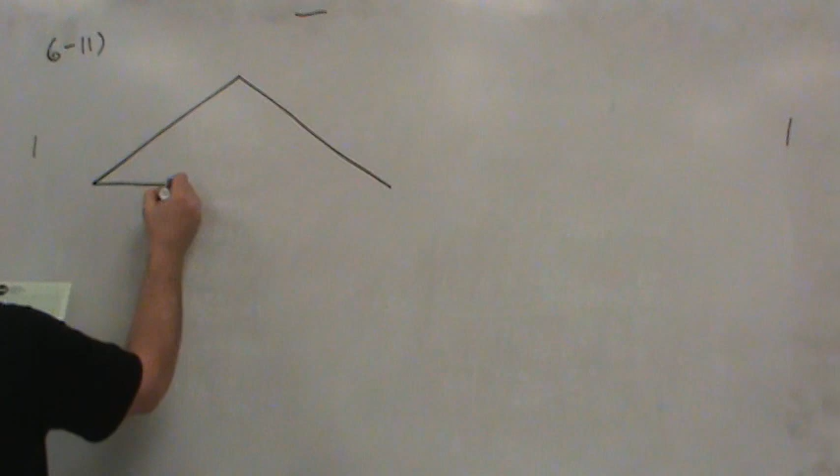Several geometry details to include. The structure of the truss looks something like this.

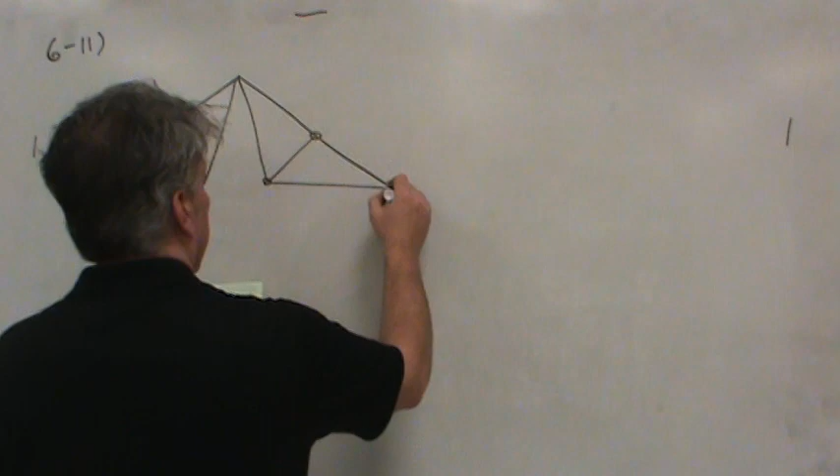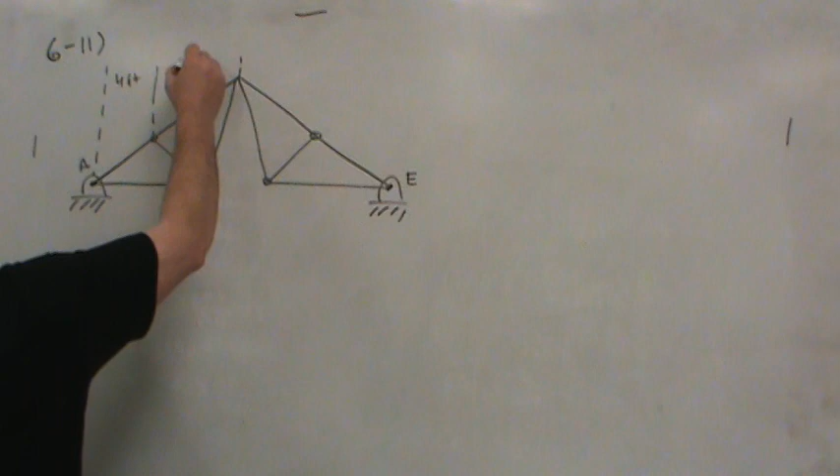Pivoted or pinned at A, pinned at E, with a 4-foot spacing horizontally between the pins, despite my drawing. And it's a symmetrical truss.

Now what is not symmetrical is the loading. P1 at 600 pounds is at the center, so that's not what makes it unsymmetrical. It's this load over here, P2, at 400 pounds.

Now other geometry given is that the overall height is 6 feet. And hopefully you realize that this line, since it's broken up horizontally in equal increments, then we also have 3 feet heights

on that center pin. By the way, there are letters given to each pin. Let's jot down those letters. Here we are. And that's the problem that we're supposed to solve.

So what I wanted to do was get some geometry for all of this, because we've got overall things, but for example, what's the length of this side, or this member, or this member? So let's see if we can figure that out.

Now notice that this is a right triangle, as is this one, and therefore these two triangles, CDF and DFE, are similar triangles. Maybe not in the order of the letters that I gave them, but they are similar triangles. So if we could just figure out this triangle by itself, we'd have it.

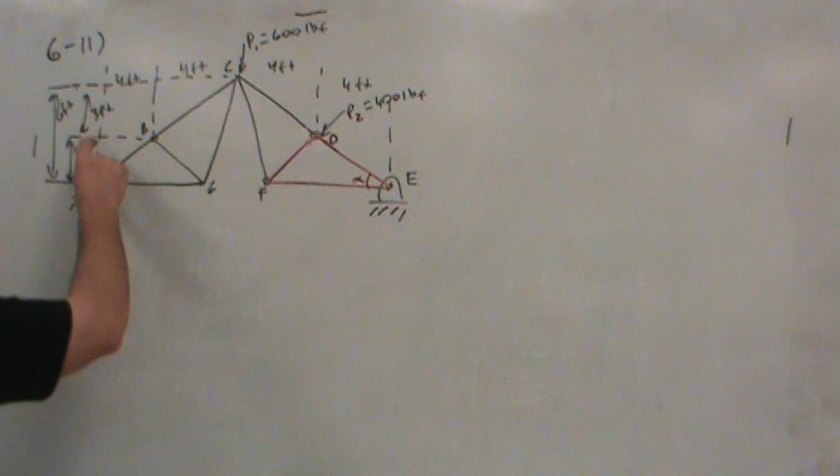Now, it's pretty apparent that if we've got a 3-foot height and a 4-foot side length, then we can use that information to our advantage, because we can think of breaking up this triangle into parts like this, right?

We know that this height is 3 feet. And we also know that this base is 4 feet from there to there. So that means that the length of a side is 5 feet.

So we know now that we've got a 10-foot length on that overall side, okay? Not really a big surprise. I mean, you can look at this length, 3, 4, 5. Okay, that makes sense.

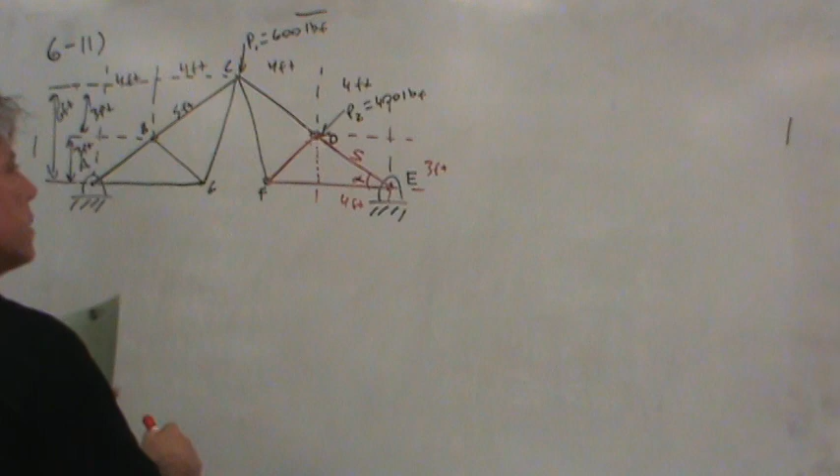But I wanted to point out that what we really know is this base length of 4 feet here. Now, since this is in fact a right triangle, there's another triangle we can consider.

Let's consider the overall triangle again. The overall thing where the base is not, well, it would be the hypotenuse in this case. So forget that 4 feet for just a second. Let's call this angle over here beta.

If we now consider breaking up that right triangle into some other right triangles, just looking at these angles, you should realize this angle has to be alpha. Why? Because the original triangle had alpha, 90 degrees, and beta. The new triangle still has beta here at a 90-degree angle, so that side has to be alpha. Okay?

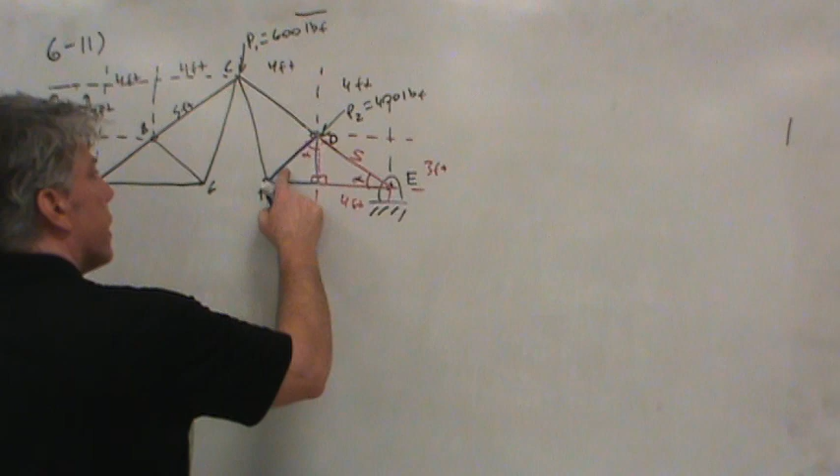And that's sort of the key to this problem. So let me highlight this new triangle in blue so it's easy to see. The angle beta doesn't matter, it just proves that the other interior angle is alpha. That's all we really need.

So let's pull out this triangle and work with it just a bit. And I'll put dimensions on this figure in a moment. So what do we know about this triangle? Well, we know that this side has a length of 3 feet.

We know the angle here is alpha, and so since the original triangle is a 3, 4, 5, or the other red triangle is a 3, 4, 5 triangle, and the blue triangle is similar to it because of the angle alpha, then this is also a 3, 4, 5 triangle.

However, that becomes a little bit confusing. Let me just call this side y for the time being. We know it's 3 feet, but let me just call it y. Now the way this is set up, obviously the hypotenuse is the 5 side.

And if you think about this, we have to rotate it to relate it to the red triangle. So this is the 4 side, this other side is the 3 side.

Now we're just talking about ratios here, so what about if we scale the side lengths based on this side? So let's call this the 4 over 4 side, this is the 3 over 4, the 5 over 4 side. All we've done is multiply by a constant, and their ratios are still the same.

So what's interesting about this is we can multiply y by the fraction for the side and get the length. For example, we know that y is 3 feet, 4 over 4 is 1, so this side is 3 feet. All we have to do is multiply by y on this side and y on this side, and now we have the side lengths. Now we know that y is actually 3 feet, so now we know the length of this side. It is 9/4 of a foot.

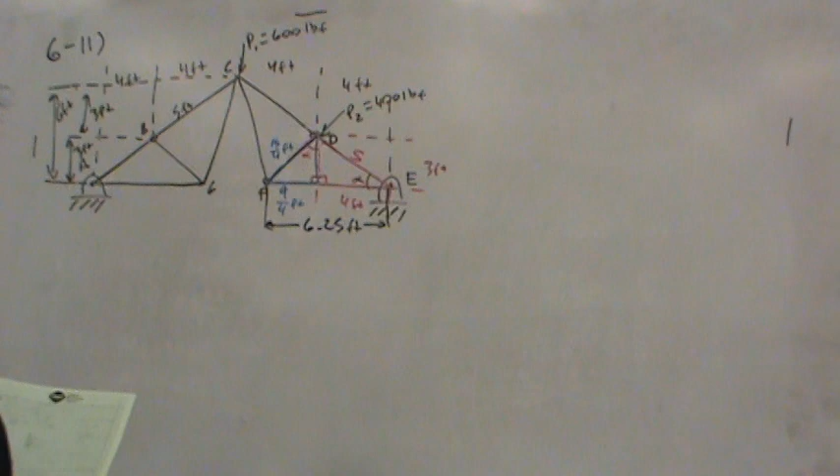There's one more bit of information that would be nice to have. Let me sketch a bigger section of the truss. This. And by the way, 15 over 4, let me just write in what this number is. 15/4 turns out to be 3.75 feet. And I don't think we need this broken up anymore, so let me just write 6.25 feet there.

And we don't need any of this stuff anymore. But the length overall of this side would be 5 plus 5 is 10. We know this is 3.75 because we have similar triangles. This is 6.25, as is this one.

So let me ask the question, what about this little triangle right here? It's also a right triangle. It has a hypotenuse of 6.25 feet. It's from here to here. And what about the height? Well, the height is 6 feet.

So what about this base? Well, you could use Pythagorean's theorem to determine it. When I did that, I found it was 1.75 feet. Okay, so this little triangle right here was another one that I was concerned with. The reason I wanted that is because I wanted to know what this dimension is, and it's 1.75 feet.

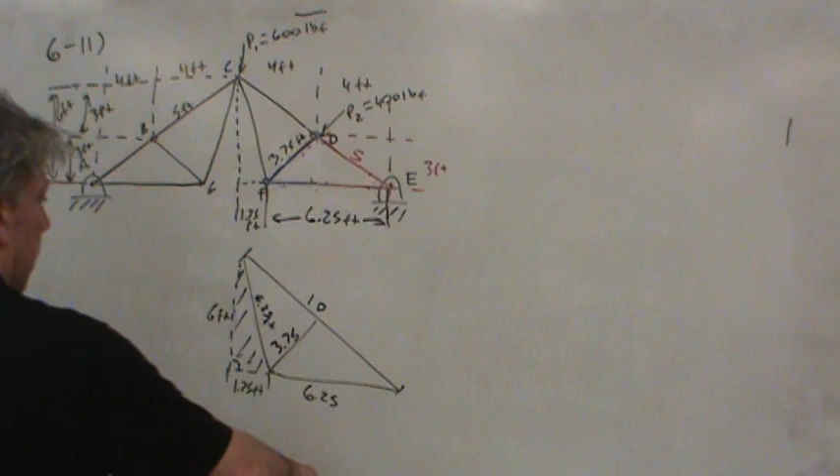So now I think we've got all of the relevant geometrical information that we need. Not surprised, no, I didn't have to go through that. I could have simply said, well, we've got 4 feet, 4 feet is 8, minus 6.25 is 1.75. But for whatever reason, that's the way I went. Okay. So there's our geometry.

Now let's continue with a free body diagram and actually get into the statics of this truss, or a static analysis of the truss. So we've got our 600-pound load external, we've got our 400-pound load, and despite my drawing, it acts directly along that line FD. We've got AY at A as well as AX. We have EX at E and EY.

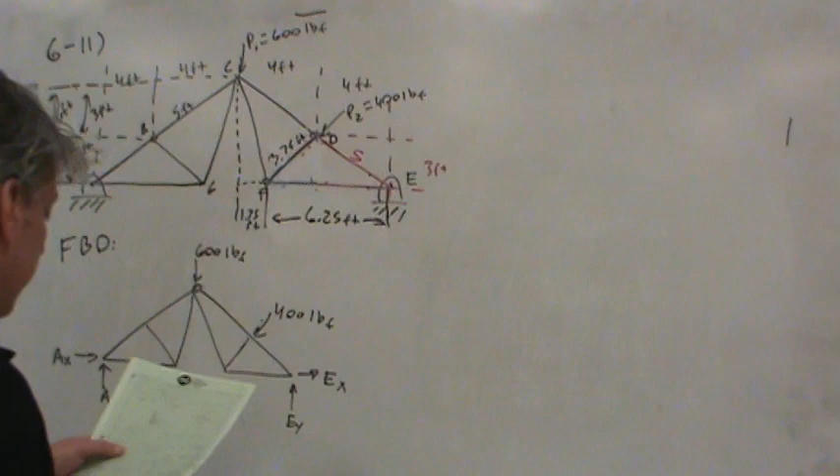And so now we can start solving this truss. For example, we can sum moments about point A in order to determine, well, anything else, I guess. Sum of moments about point A taking counterclockwise as positive. What would we get? Well, notice that EX passes through that point. EY does not. AY, AX pass through. That's the whole point in taking moments about point A.

It's going to be a little bit of a pain to deal with this 400-pound force, but we can do it. But we're trying to go for EY. So let's start off with that. We've got 16 foot times EY. Okay, that's the whole point in calculating this sum of moments, and EY does cause a positive moment.

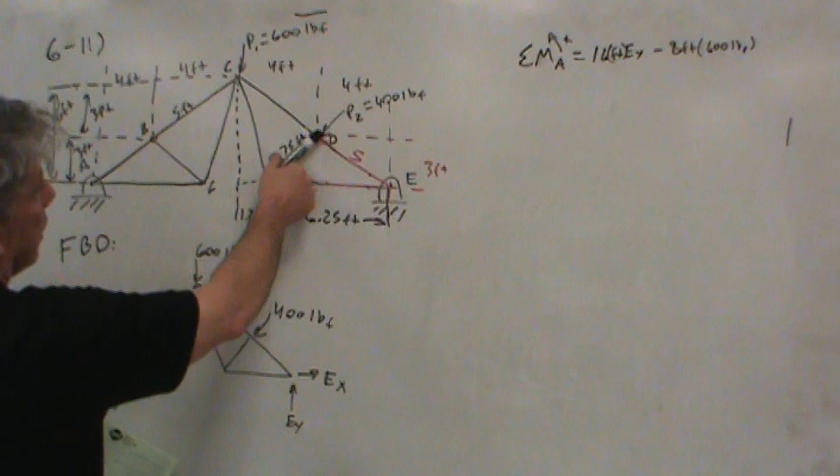The 600-pound load causes a negative moment, so minus 8 foot, its moment arm, times 600 pounds. But what about this 400-pound load? Well, the key is that it acts right along this line. So coming up with its horizontal and vertical components will actually be pretty easy.

Let me do this. Let's go back to that blue triangle we were talking about a little bit earlier. And let me draw it over here. It is the geometry triangle that will help us break up this 400-pound load into horizontal and vertical components. Remember the ratio of the sides. We had one side over here was the, well, let's just use the geometry we have. We have a 3-foot side, 3.75 foot side, and I erased this, but it was 9/4, if you remember, of a foot.

That comes out to, well, 4 away from that, so that's 2.25. Now we can use that to calculate the horizontal and vertical components of the 400-pound force. So all we have to do for this side to get the vertical component is take 400 times what? Multiplied by 3 over 3.75.

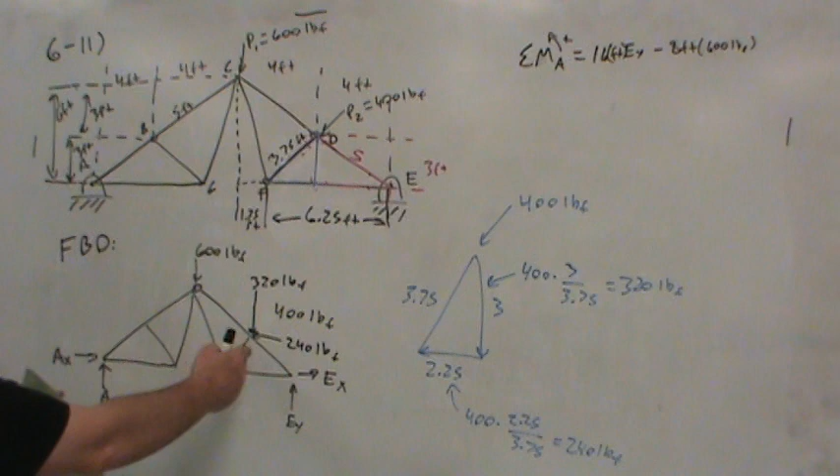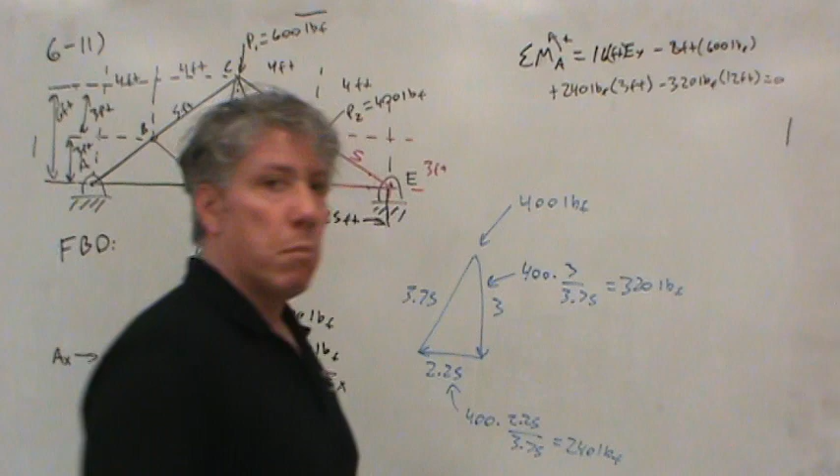Now calculating the moments of these two forces will give us the same equivalent moment to the total 400-pound force, but now the geometry is easier because look, the moment arm for the 240-pound force is only 3 feet, and it is a positive moment. So plus 240 pounds multiplied by the moment arm of 3 feet, because this force acts up above the point by 3 feet. And then all we need is the moment arm for this 320-pound force, but that is 4 plus 4 plus 4 is 12. And of course it's a negative moment about A because it tends to rotate clockwise. So minus 320 pounds multiplied by 12 feet.

So this moment sum, the sum of the moment of these forces, must come out to 0. So from this we can solve for EY. I won't show you the algebra, it's pretty straightforward. It comes up to 495 pounds. Basically, take this sum here, take the opposite sign of it and divide by 16, you'll have EY. So that gives us EY. Now what I'd like to do is go for another color and actually put the reactions on the diagram so that we'll have the space to solve this, because we're going to need quite a bit of space here in a moment. So 495 pounds is EY.

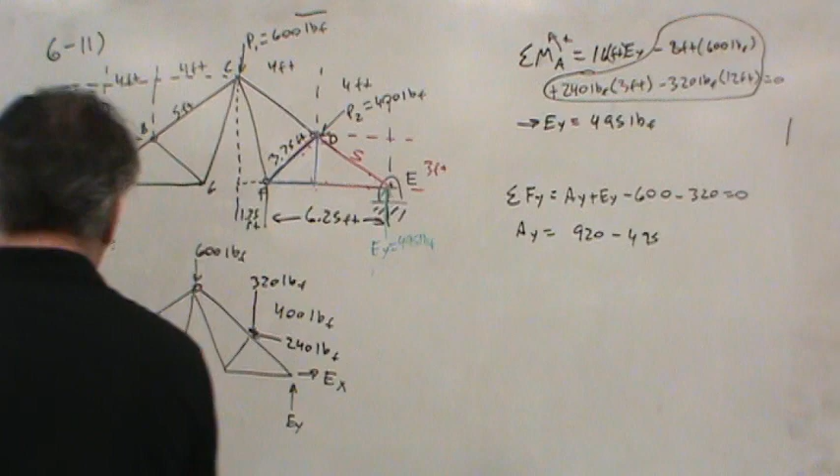Now, if we sum forces in the vertical direction, we should be able to find AY as well. So summing forces in the vertical direction for the overall free body diagram, now that we've broken up that 400-pound force into two parts, that should be pretty easy. So that would be what? Well, it'd be AY plus EY minus 600 minus 320 equals 0. Right? Let's see. Have we accounted for all? 600, 320, EY, AY, yes. And so solving for AY, we would get, let's just combine these two and move to the other side. So that's 920 minus EY, so minus 495. If you do the math, you'll find that the magnitude of AY is 425 pounds. Okay.

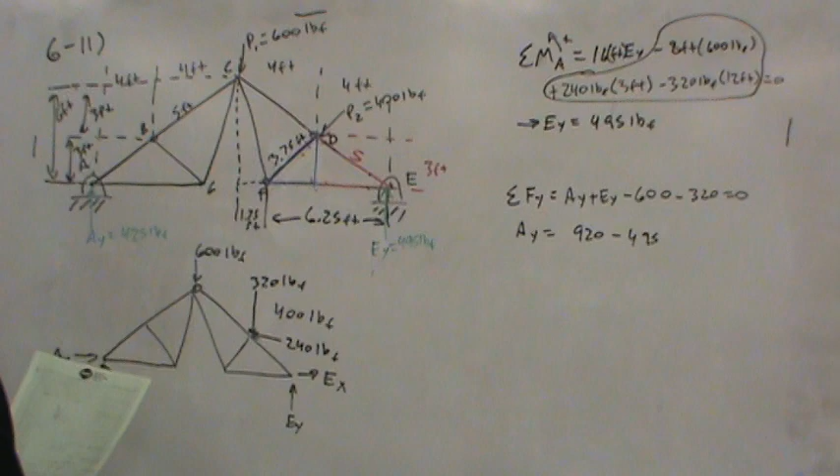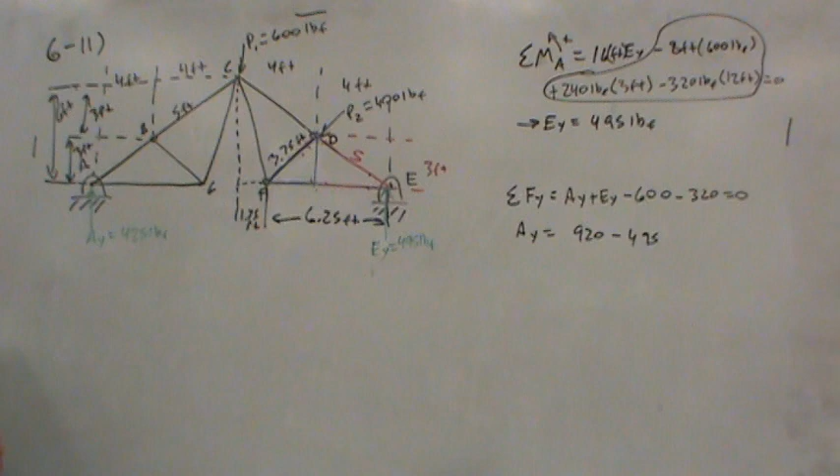So now we found AY and EY. What about AX and EX? Well, we can't really say much about the horizontal components of force at A and E, but we can write down an equation that we'll kind of keep in our back pocket and maybe use it later as a check or use it to calculate reactions, I don't know. But basically, if we sum forces in the horizontal direction, oh, I've just erased my free body diagram, I'm sorry. Remember there was AX and EX, and the only other component of force in the horizontal direction was the horizontal component of P2. And it was a negative component, and it would be magnitude 240 pounds. So all we have is a relationship between AX and EX from the overall free body diagram.

Okay, now there's something else that we can notice here. Let's look for zero force members. We can't say that this member is a zero force member because if you think about the free body diagram of point D, which we'll get to in a moment, you realize we have P2 as well as force here. Yes, it's true, CD and DE can't apply any force in this direction, but obviously since P applies force, this member has to apply force. And actually the magnitude of the force in this member, FD, has to be 400 pounds compressive, right? That's pretty easy to see.

In fact, why don't we go ahead and write that down? I kind of stole my thunder, but this must be 400 pounds and it is compressive. So I'll write in parentheses C. But notice BG, if we consider a free body diagram of point B, the line of action of CB and BA are collinear, and therefore, since there's no other external force, the force in BG has to be 0. It is a zero force member. Okay, so we'll start with those two.

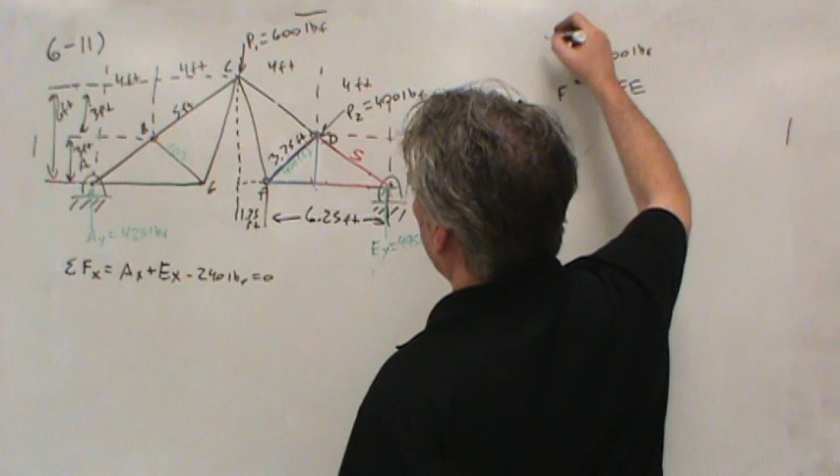Why don't we go ahead and consider, I guess I did consider my free body diagram of D there, I just did it in my head. How about if we consider point F? Because since we know 400 pounds of compression in member FD, we should be able to solve for the force in the other two members, FE and FC. So let's go for a free body diagram of point F and see what happens. So we know there's a compressive force of 400 pounds here acting along FD. And the question becomes, what is FE's magnitude and what is CF's magnitude? Okay.

If we sum forces in the vertical direction on point F, what will we get? We'll get the vertical component of the 400-pound load, which was negative 320 pounds. So this comes from this part. But then CF is the only other thing that can counteract it, so CFY would be the only other force.

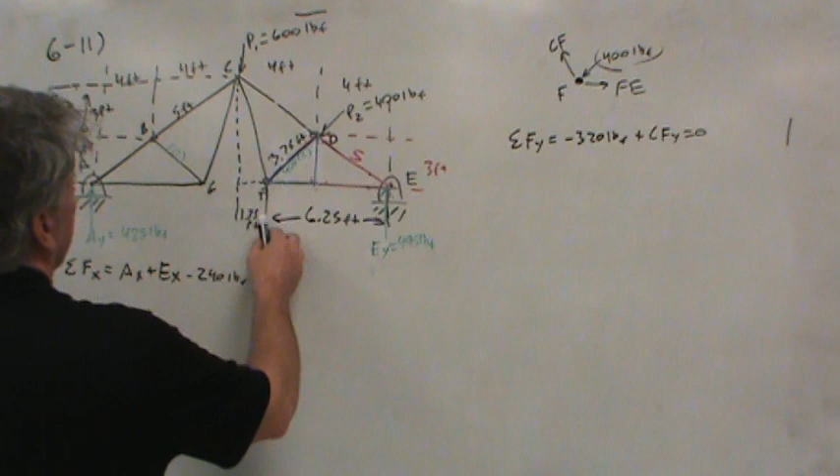Now, how can we figure out the y component of CF? We have a triangle here to do that. We know the length of this side is 6.25 feet because it's similar to this one. We also know the height of this triangle is 6 feet. So to get the vertical component of the force in this member, we take 6 over 6.25. Let's make that substitution.

And now from this we can solve for CF. So the force in CF would be 320 times 6.25 over 6. When you do the math, well, by the way, I'm assuming CF is tensile. It came out positive, so it is in fact tensile. You'll find that the load in this member is 333.3 repeating, and of course it is a tensile load.

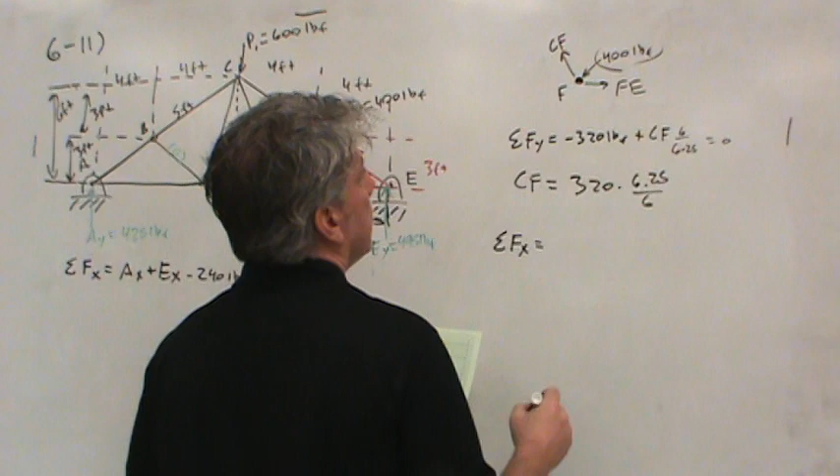What about summing forces in the horizontal direction? Well, there we'll have FE minus the horizontal component of the 400-pound force, which was 240 as I recall. But notice we also have tension from CF, let's call it CFX. So FE, the force in that member, would be equal to 240 plus CFX.

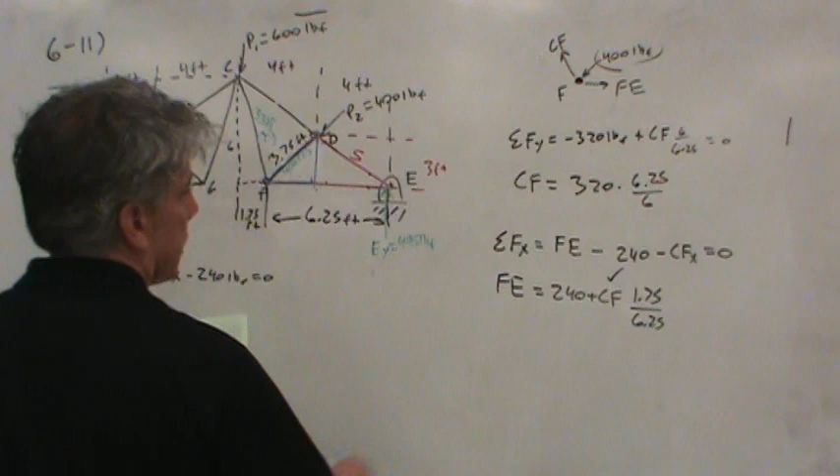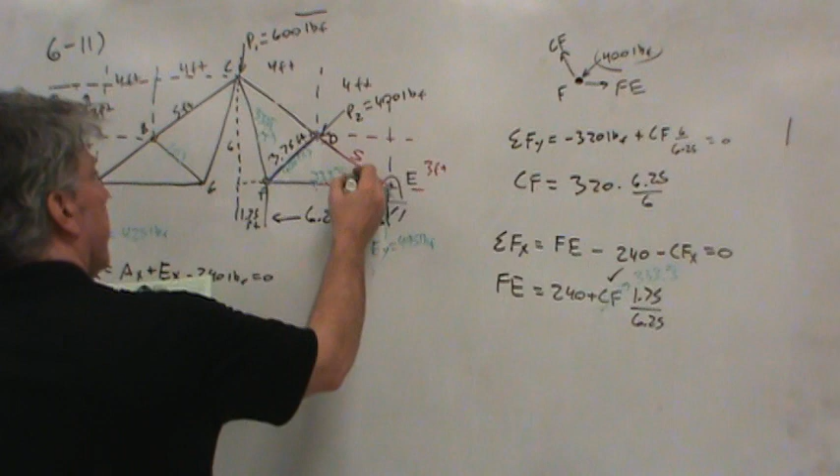But to get the horizontal component of CF, we need 1.75 over the hypotenuse. I erased its length, but hopefully you remember that was 6.25 feet. So since we know CF, we can plug in numbers now and find the magnitude of force in member FE. CF is 333.3 repeating. Plug that into your calculator and you'll find FE is positive, so it's tensile, and the load in FE comes out, ironically enough, to 333.3 repeating, and it's a tensile load.

All right, so that takes care of the free body diagram of F, and we've managed to find the force in 3 of the members, well, 4 so far in the overall problem.

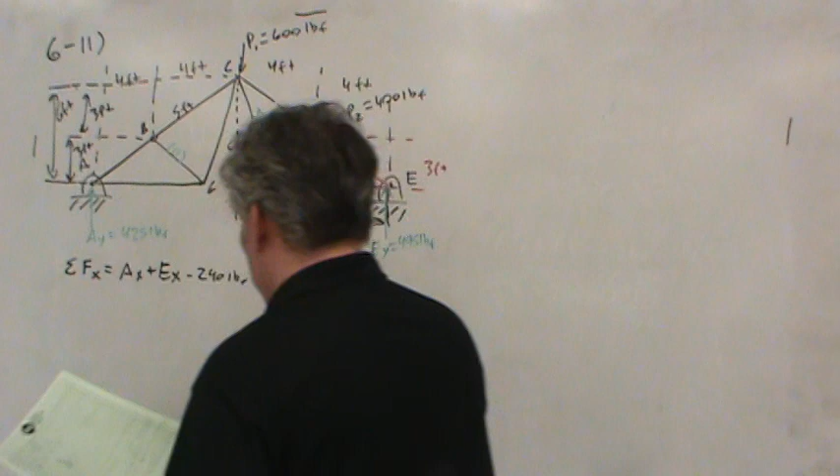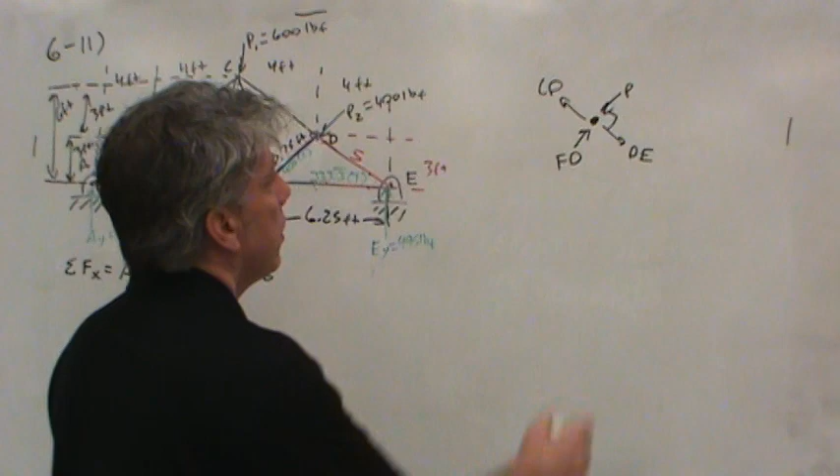Now we'd like to know the force in these 2 members. Notice, if you think about a free body diagram of point D, I probably should have drawn it from the very beginning, we already figured out that whatever load P is, the force in FD has to counteract it. But if you think about the load in DE and CD, there's no interaction here, right? These are perpendicular to one another. And so CD must be equal to DE from the free body diagram of point D, or pin D.

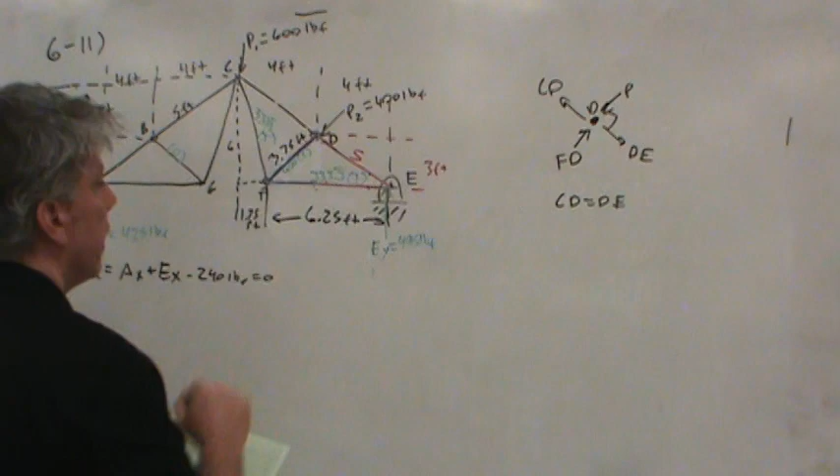So if I just knew the force in either CD or DE, I would know the force in the other. So what I'm going to do is consider a free body diagram of point E. We know that CD and DE are equal, let's jot it down so we don't forget it, and that's from a free body diagram of point D. Let's consider a free body diagram of point E, because now we know EY and we know FE, and so we should be able to figure out DE.

Now, there is one more force at this point, and that is EX. So what do we know, what do we not know? We know FE, we know EY, and we should be able to get EX as well as DE. This is a good thing. So let's start off by summing forces in the vertical direction, because I'd like to get the force of the member first. That would be equal to EY plus DE in the vertical direction, so let's call that DEY, and that's it, there's nothing else.

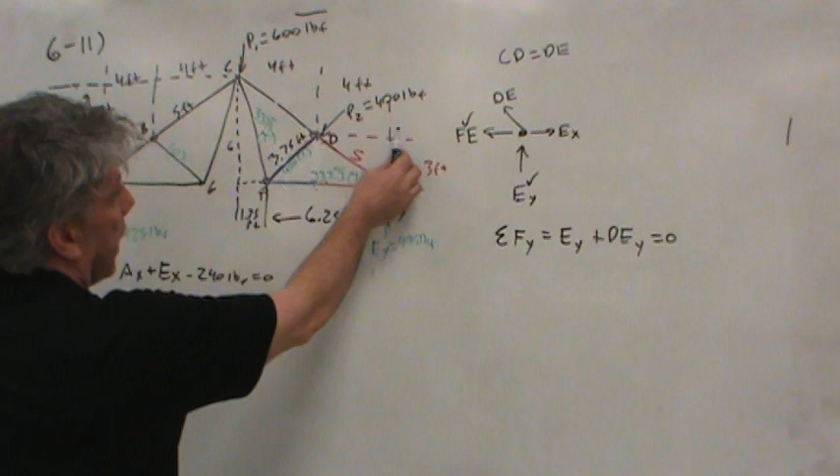How do I get the vertical component of this line? Let's see, I see a 3, 4, 5 triangle, so I need the 3/5 length. That's it.

So if we then solve for DE, we'll get negative EY times 5/3.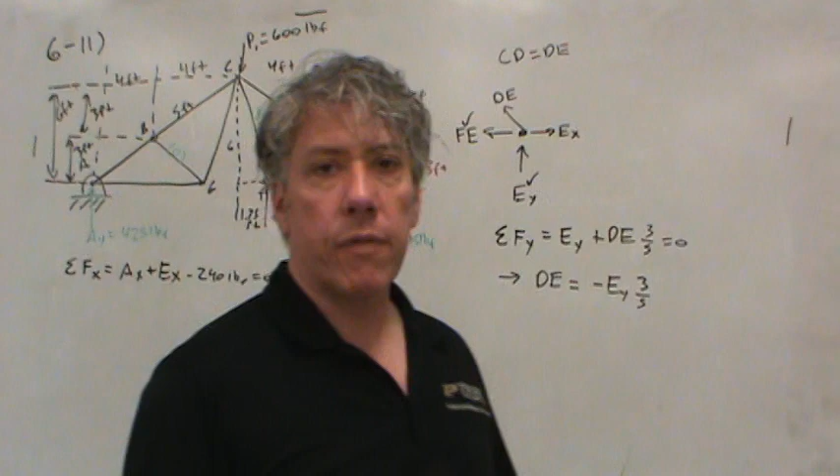Notice it doesn't really matter how these reactions occur. What matters is that I've plugged in the load in the member as a tensile load, so if I get a positive number, I know it is tension, and if I get a negative number, I know it is compression. I'm getting a negative number. Not surprisingly, the upper chord of this truss is most likely going to be in compression, right? That's what we expect, so this is not really a surprise.

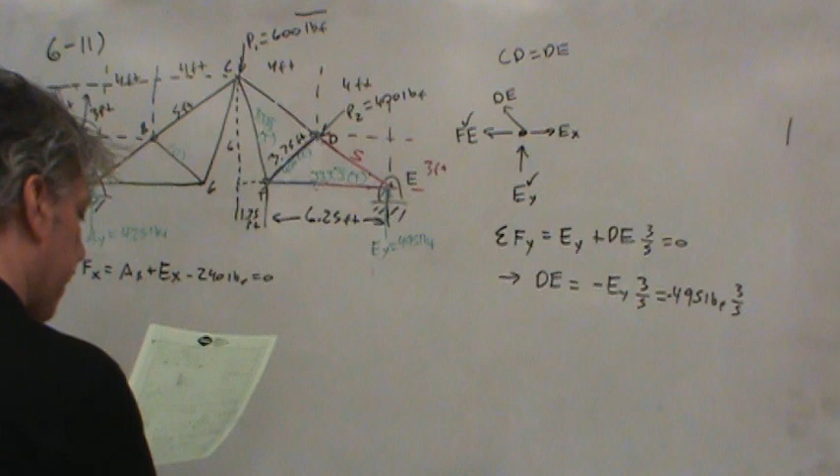So EY has magnitude, well, let's not forget our negative sign, 495 pounds. Take 5/3 of that, and we get the force in DE, which is a compressive force. So when I did the math, I found that the force, let me just get rid of that 5, we don't really need it right now, is 825 pounds, and that is a compressive load.

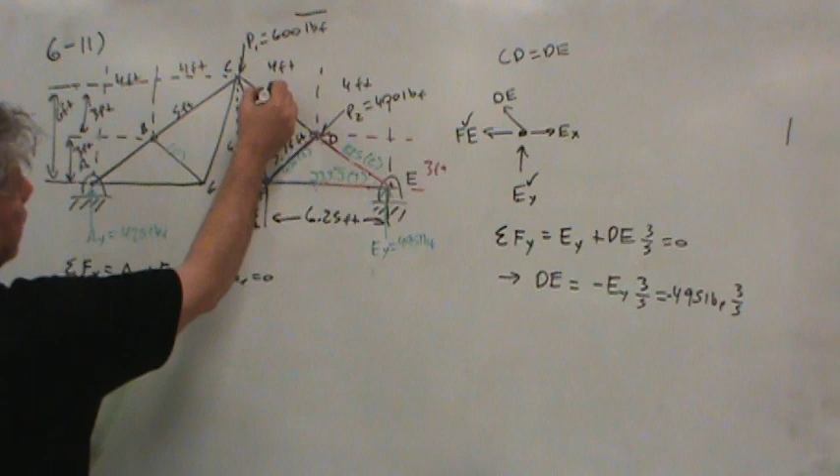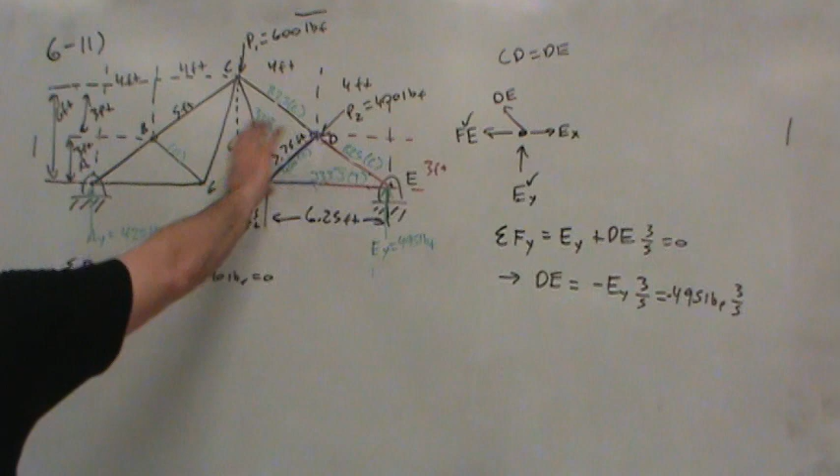Now, since we know that CD and DE are equal in force magnitude, that gives us 825 pounds compression in CD as well. And we're basically halfway through this truss, right? We've solved all of the right-hand side and one of the left-hand side.

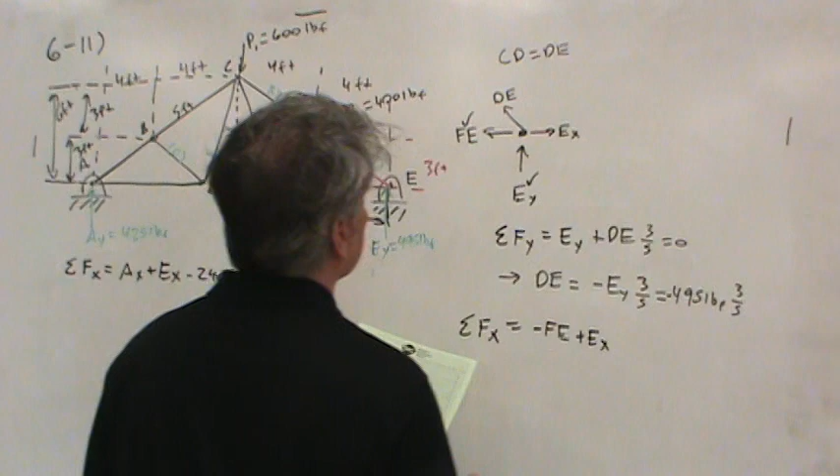Now we can go ahead and use the fact that we've got another equation to solve for the force EX. So what would that be? Well, negative FE plus EX minus DEX. Remember, I'm assuming DE is tensile, and when I plug in the value for DE, I'll plug it in as a negative number. So solving for EX from this, it would simply be FE plus DEX. Well, FE is known. The force in member FE is a tensile load, so 333.3 repeating.

DE has a magnitude of 825, but it's negative, so there's my compressive load, but I only want the X component of DE. How do I get it? Well, again, remember this small red triangle was a 3, 4, 5 triangle, so I just need the 4/5 side of that.

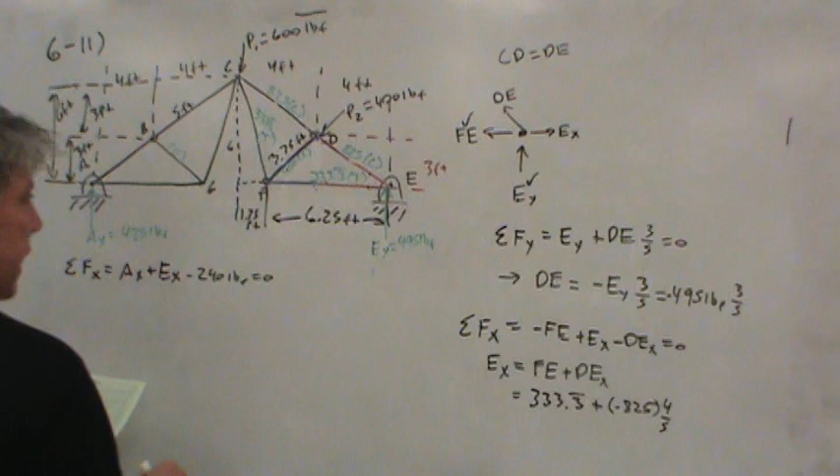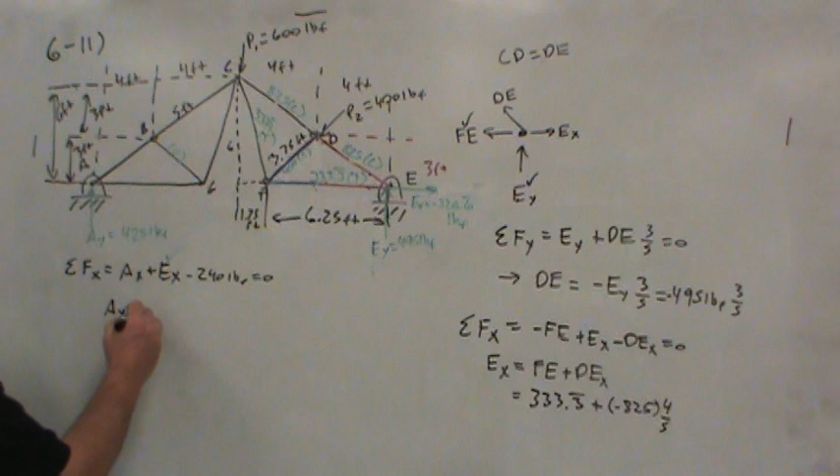And when you plug in the numbers to your calculator, what you will find is that EX is in fact negative. So EX, I will draw it in the direction that I had on the original free body diagram, like this, but it is a negative number from this equation. It is negative 326. You know what, I don't like that, I'm going to move it down. EX negative 326.6 repeating pounds force.

Now, when you plug that in for EX into this equation and solve for AX, it will yield AX. In fact, AX would be 240 minus EX, so 240 minus negative 326.6 repeating. And when you do the math, you'll find that the value of AX is, let's see, 566.6 repeating pounds force.

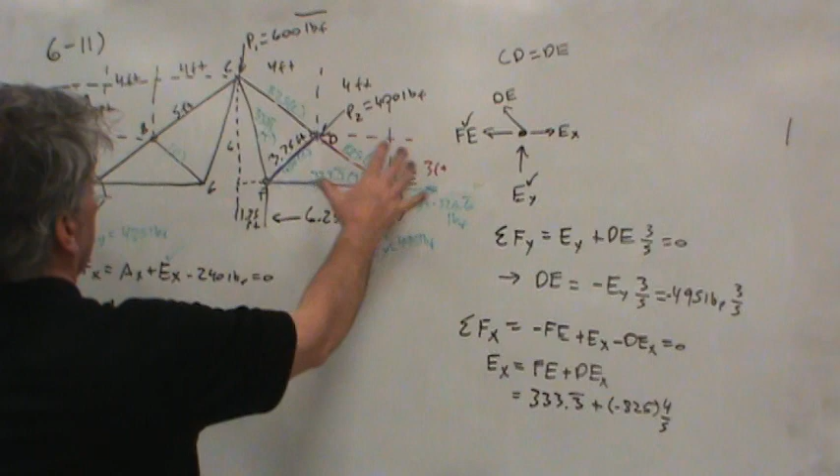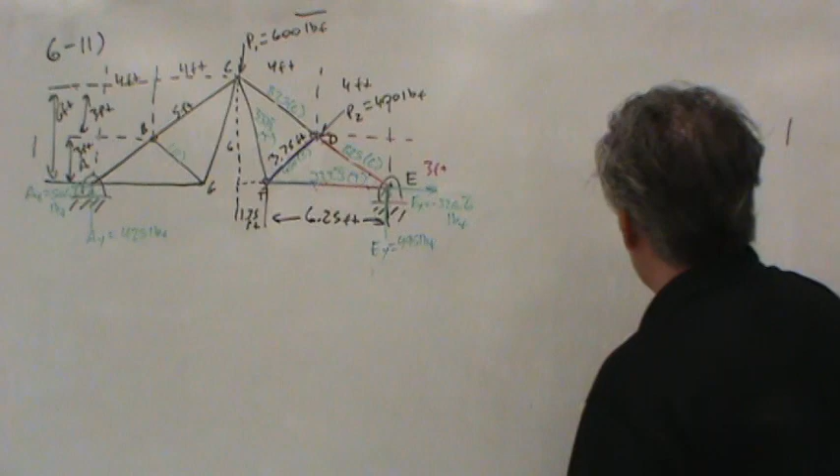Now, in reality, of course, pin E is pushing this way. Both A and E are pushing this way, which makes sense. If they don't, the whole truss will just sort of collapse out of the center, right? So that makes sense. So now I'm satisfied with all of those results.

Okay, so now let's continue and consider another point. Now that we've got the reaction at A, why don't we take A as our next free body diagram, or free body point. We've got AY, we've got AX, we've got AB, and we've got AG acting on this point.

Now we know that AY is 425, and we know that AX is 566.6 repeating, and these are of course both pounds. So why don't we begin by summing forces in the y direction? Why? Because AG will not appear. I will get AB directly, and then the horizontal component of AB can be included to find AG. So summing forces in the vertical direction, I'll have 425 pounds from AY plus ABY, and that's it. There are no other vertical components of any forces on the point or on the joint.

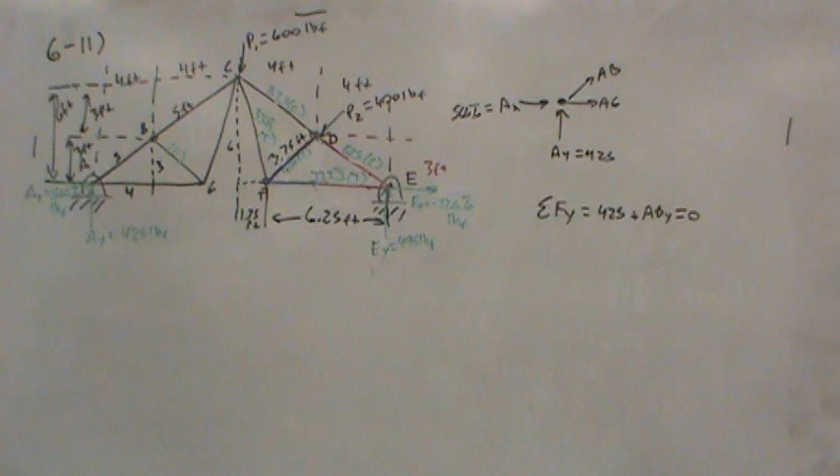So how would I get ABY? Well, remember that this triangle is a lot like that one, right? It's a 3, 4, 5 triangle, at least to there, okay? So in order to get the vertical component of AB, I just need 3/5 of AB. So let's make that substitution.

And now let's solve for AB. So AB is 425, well negative, we got to move it to the other side, times 5/3. Okay, when you do the math, you will find then that FAB is 708.3 repeating, and it's of course negative, so that's compression. So 708.3 repeating in compression, pounds force.

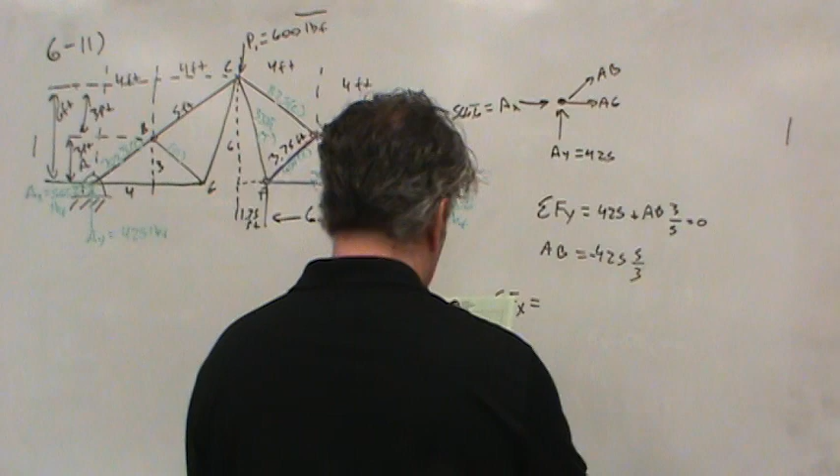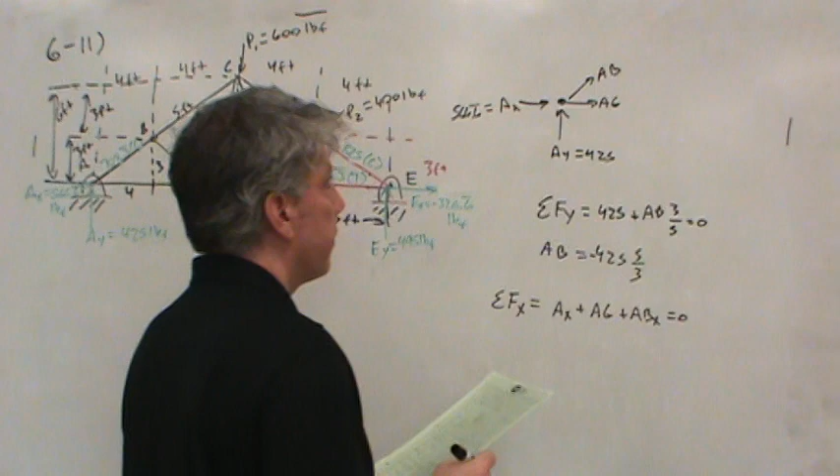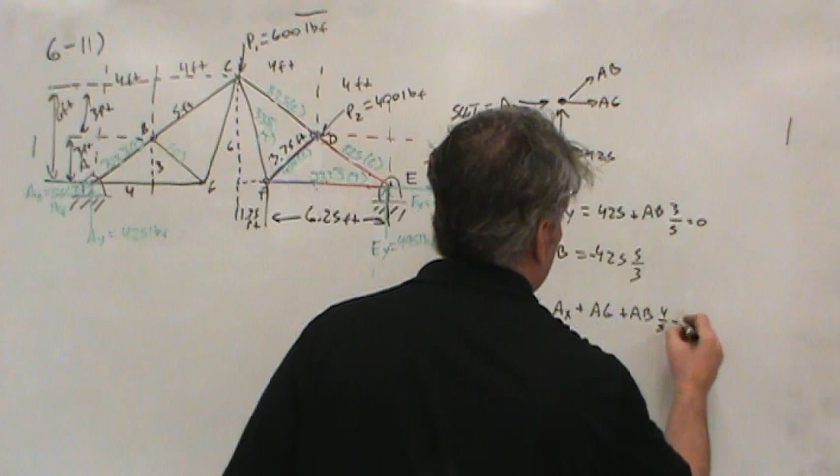Now if we sum forces in the horizontal direction, we'll have AX plus AG plus ABX equals 0, okay? Now how do we get ABX? Well, again, AB is right here, so that's the 4/5 side of AB, or 4/5 times AB.

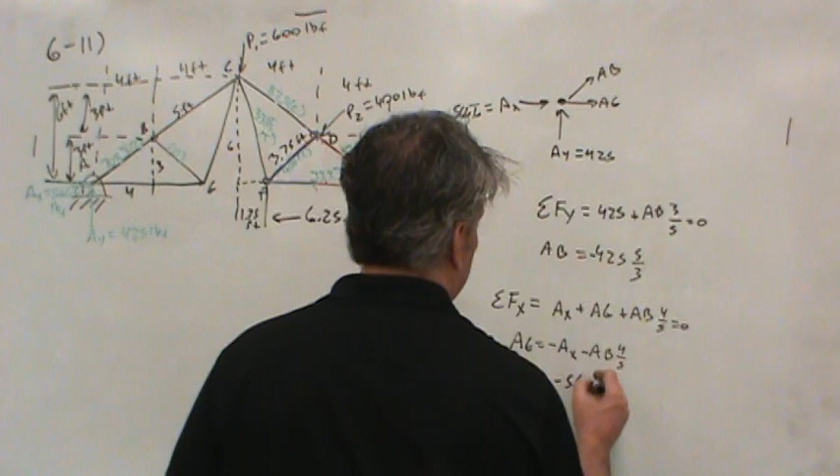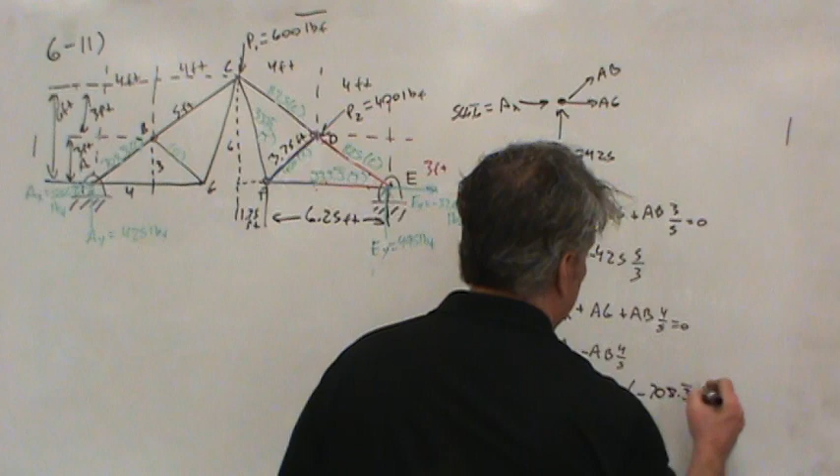And so if we solve for AG, we get negative AX minus AB times 4/5. Well, negative of AX would be negative 566.6 repeating, but remember AB is a negative thing, it is in compression, so 708.3 needs to be plugged in negative, and then take 4/5 of it. So here is the load in member AG in pounds. When you do the math, it turns out that the force in member AG is actually 0.

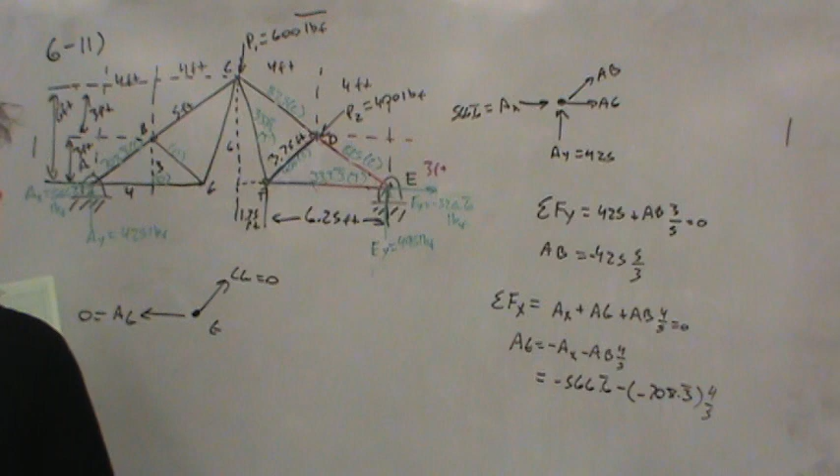Now we could have determined this in a much easier way. We could have taken point G as a free body and said, look, this is the only thing that can happen, right? There's BG, CG, AG, but we already know BG is 0, a zero force member. So there's no way CG could have a vertical component because AG could not resist it. Therefore CG would have to be 0, and since the horizontal component of CG is 0, so is AG. So a free body diagram of point G would have yielded quicker the fact that AG is 0. But of course we needed a free body diagram of point A in order to calculate the load in AB.

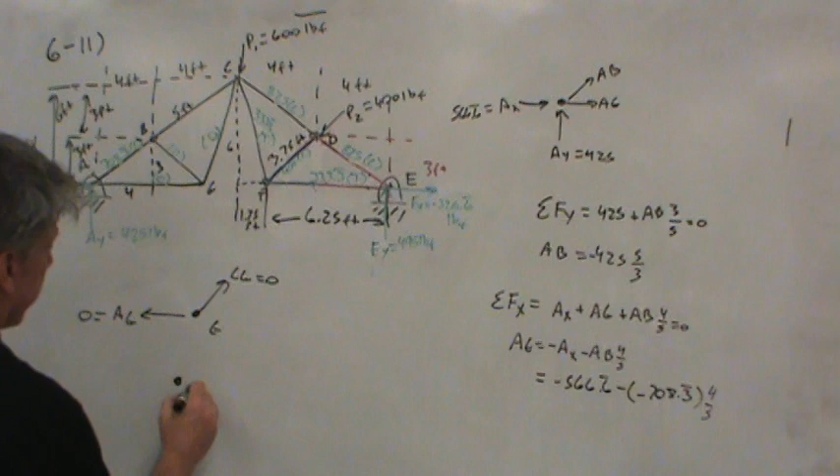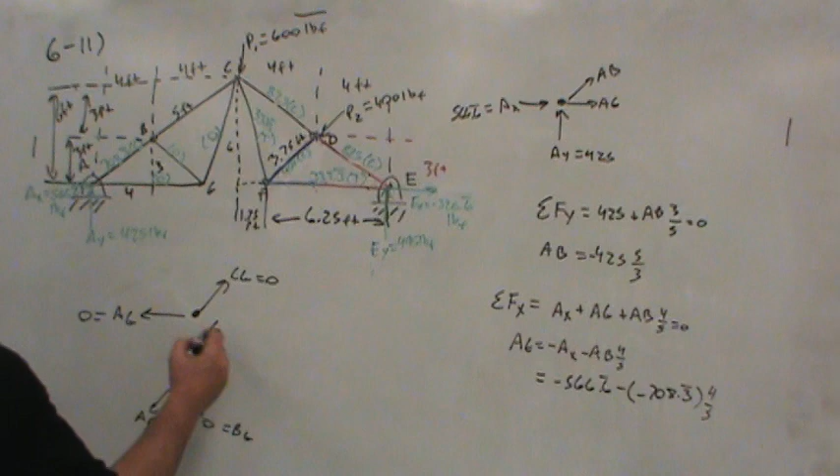Notice that all these loads are 0. Basically these members AG, BG, and CG for this particular scenario are not necessary. So what that should help you realize is, if you make a free body diagram of point B, again there's no force in BG, and therefore whatever force there is in AB and BC would have to be equal to one another. So this is also 708.3 repeating compression load in member BC. And so now we have solved for all of the forces in all of the members.

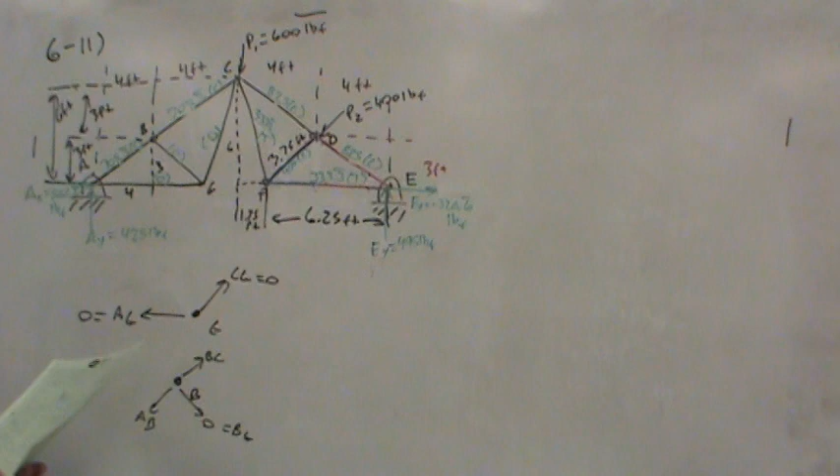However, it would be nice to verify that our solution is consistent, right? Consistency is truth. It's a good working definition for truth is consistency. So what point have we not taken? We haven't taken point C, have we? So let's consider point C last.

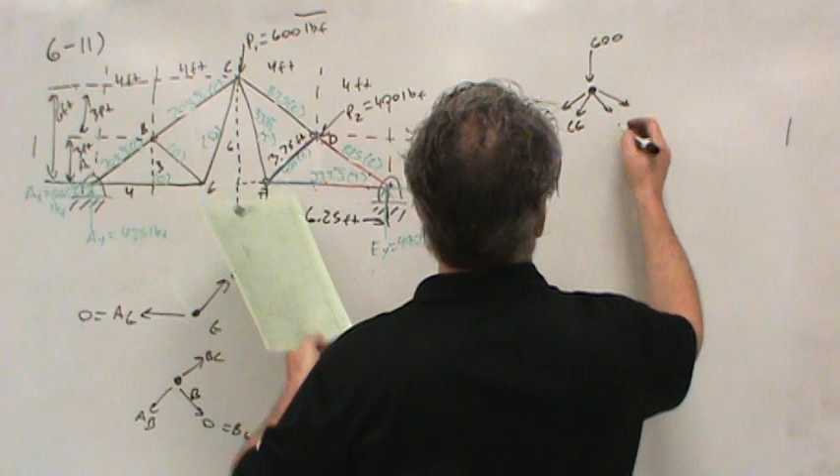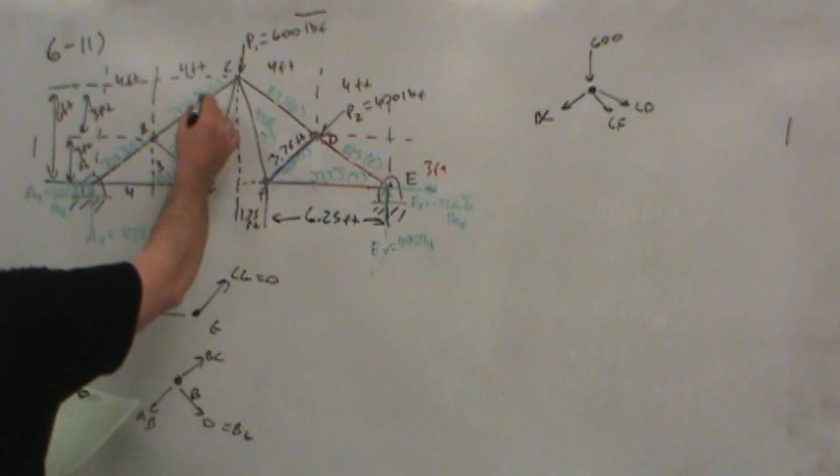There is a 600-pound load at the top of point C, and there are 4 potential loads in the 4 members pinned at C. We know we've got force in member BC. We know there's no force in member CG, we're just including it for completeness. CF has a load, but we know it. And then CD. So let's just eliminate CG from our diagram because we know there's no load in that particular member.

Now, of course, anytime we have a compressive load, we're simply going to plug it in as negative because we've assumed that all loads are positive. Looks like we've got 2 compressive loads, 1 tensile load. So let's check. Let's sum forces in the horizontal direction, which will not involve the 600-pound load, and let's see if things are consistent.

Well, let's see. In the horizontal direction, in member BC, we've got compression, so it's negative because it's in the negative direction, and the number is negative 708.3 repeating, and that's all of it. We only want the horizontal component, right? So what we've got to do is scale this component just to get the horizontal piece, so that's 4/5. That takes care of BC's horizontal component.

What about CF? CF is actually a tensile load, so we'll add 333.3 repeating, plug it in positive because it is tensile. Also there's no negative sign from the free body diagram because it does point in the positive X direction. I guess I should have written down a coordinate system for you. The CF is 333, but we don't want all of it, we want 1.75 over 6.25, the hypotenuse. That gives us the contribution of CF in the horizontal direction.

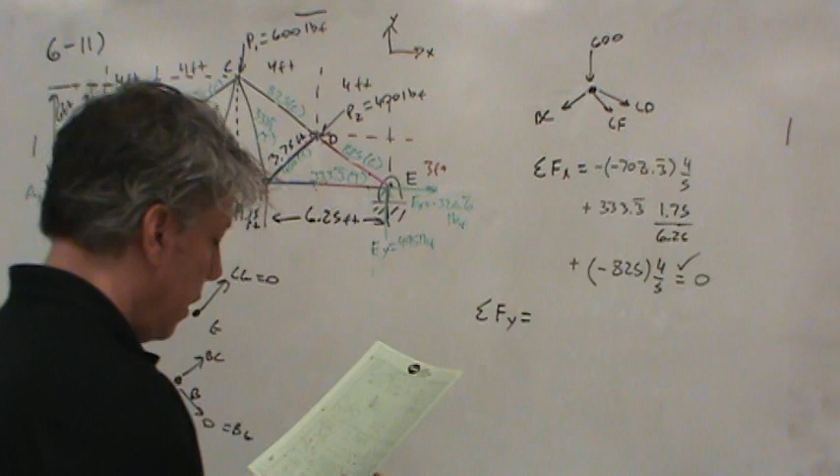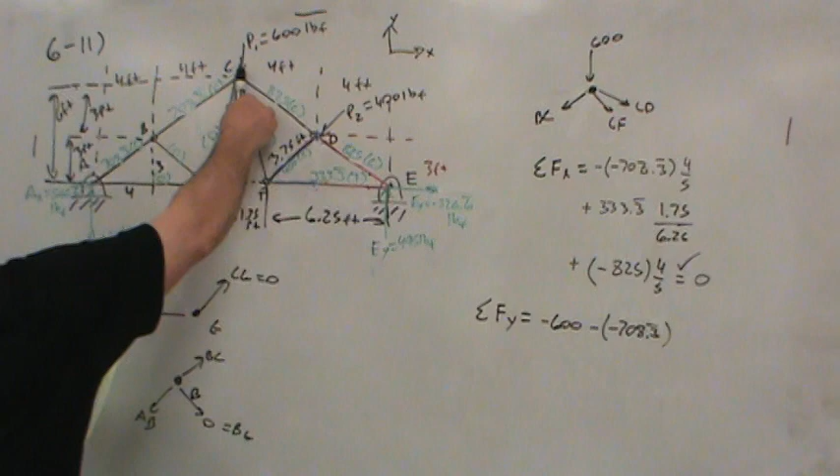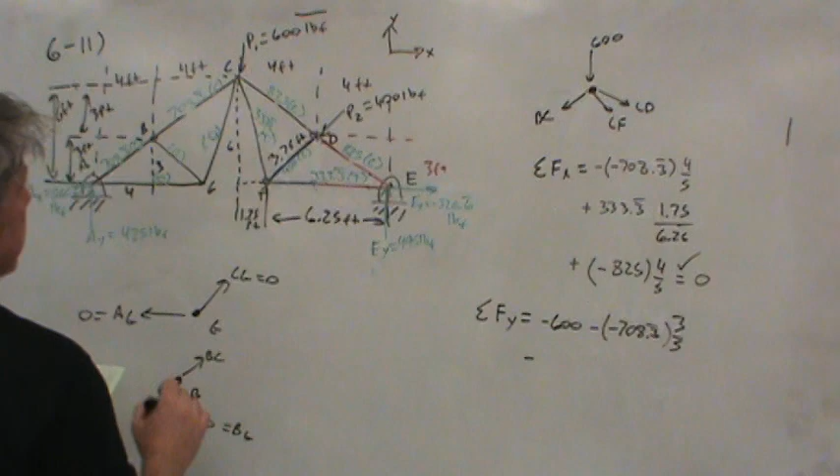Let's check the vertical direction. Summing forces in the Y direction, what do we have? There's 600 pounds acting downward, pretty obvious. And notice that BC acts downward, at least in the free body diagram, but BC is a negative thing, negative 708.3 repeating. We don't want all of it, we want 3/5 of it to get the vertical component. CF acts downward, so negative, but CF is actually a tensile load, so we'll simply plug it in as positive, 333.3 repeating, but we don't want all of it, we want the vertical piece, that's 6 over 6.25.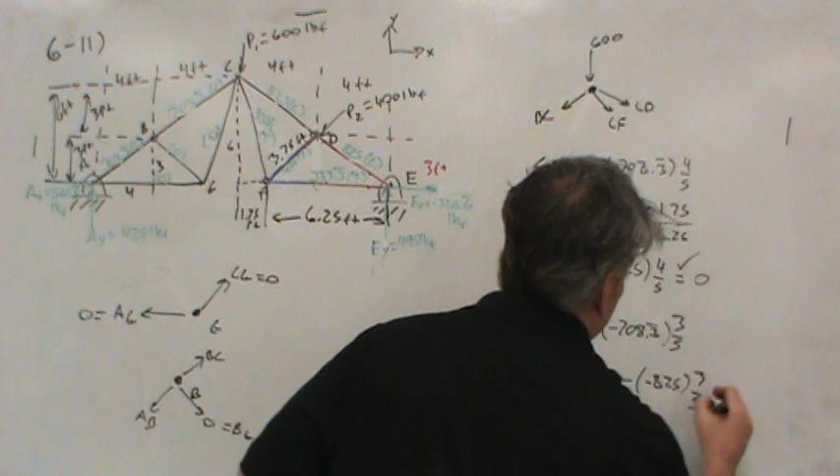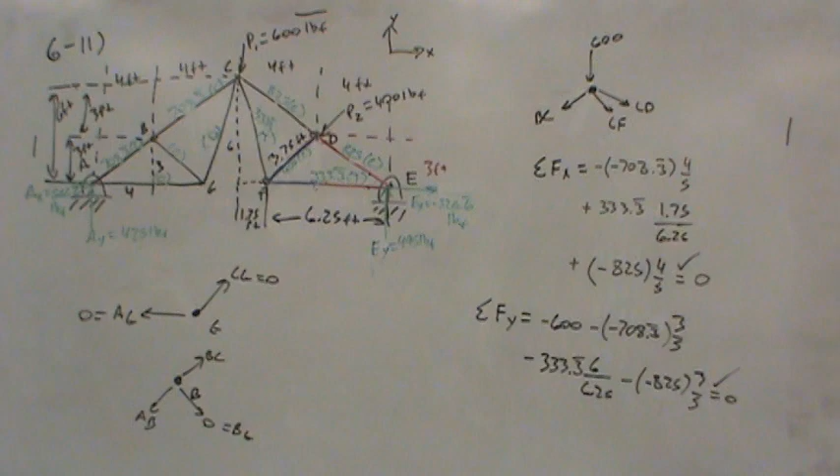And then CD acts downward, so negative from the free body diagram, but CD is a compressive thing, so plug in negative 825. And we don't want all of it, just the vertical piece, so 3/5. Does that equal 0? Well, let me double check to make sure I've not made a dumb mistake at the board. Yeah, when I did the math, I got 0 here as well. So that verifies that our solution is consistent, and now we know all of the reactions, AX, AY, EX, EY. We know all the force in all of the members for this particular loading scenario.